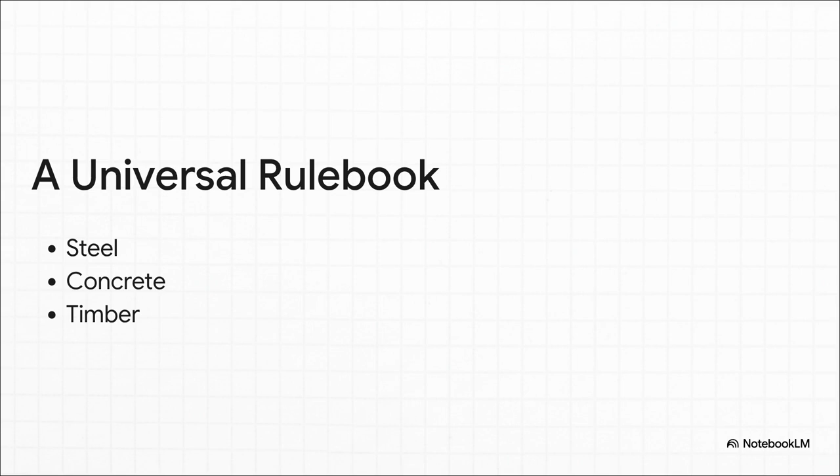You can think of it as the #1 rule for engineers. Its entire job is to make sure a structure is safe and does what it's supposed to do, not just on the day it's built, but for its whole life. And here's the thing, this isn't just for steel. This exact same way of thinking applies whether you're building with concrete or even with timber. It is the universal language of making sure things don't fall down.

So how does this whole philosophy actually work? Well, it all comes down to a really simple and honestly a pretty clever balancing act. I want you to picture a scale. On one side, you have resistance. That's the structure's capacity, how much force it can possibly take. On the other side, you have the load. That's the demand, all the force we're actually putting on it.

Now, to make sure it's always safe, engineers rig the game. They intentionally, on paper, pretend the resistance is lower than it is, and they pretend the load is higher than it's ever going to be. And that is the whole point. That's the entire game right there. The math has to show that the resistance side of that scale always wins, no matter what. It's the one rule that can never, ever be broken.

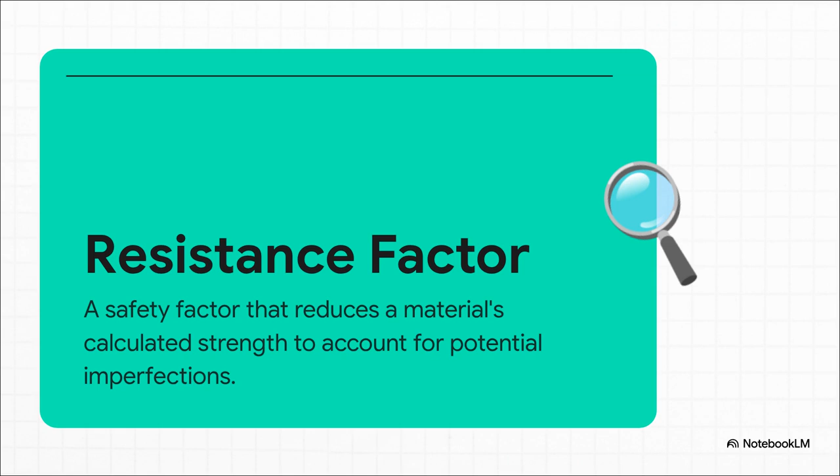So let's look at how they do that. First, engineers apply something called a resistance factor. It's basically a number less than 1 that they multiply the material's strength by. Why? Because they know that in the real world, nothing's perfect. There might be a tiny invisible flaw in the steel, and this factor accounts for that. Okay, so that's one side of the scale tipped.

Then they go and tip the other one. They apply a load factor. They calculate all the forces they expect, from the building's own weight to people to snow, and then they artificially inflate those numbers. This covers all the what ifs. What if there's a record-breaking blizzard or a huge crowd gathers in one spot? They've already planned for it.

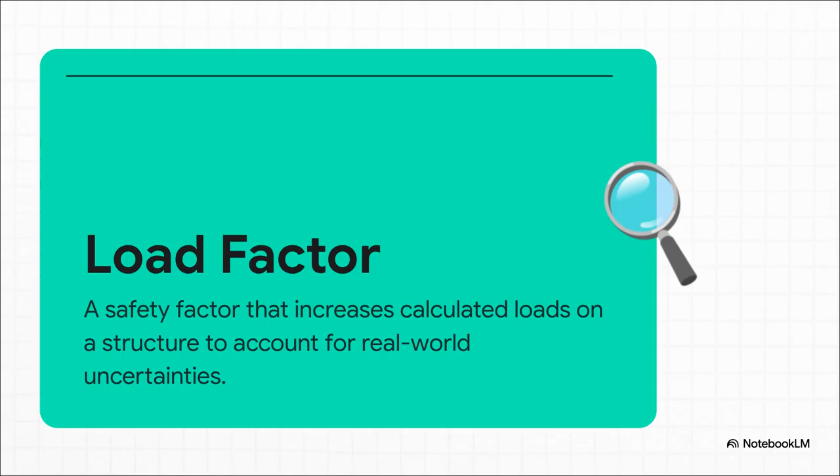Okay, so we know we have to reduce the material's strength on paper, but hang on. How do we even figure out what its true strength is in the first place? Well, the answer is in this incredible diagnostic tool called the stress-strain curve. It's really cool. Engineers take a piece of steel, they stick it in a machine, and they just pull it until it breaks, mapping out exactly how it behaves the whole time.

And that curve, it tells the entire life story of that piece of steel. First, it enters the elastic region, where it stretches like a rubber band and would spring right back if you let go. But if you keep pulling, it hits the yield point. That's the point of no return, where the damage is permanent.

But then, and this is wild, it actually gets stronger for a bit, in a phase called strain hardening. Then it hits its absolute peak, its ultimate strength, before it finally gives up and fractures. Engineers need to know every single one of those points.

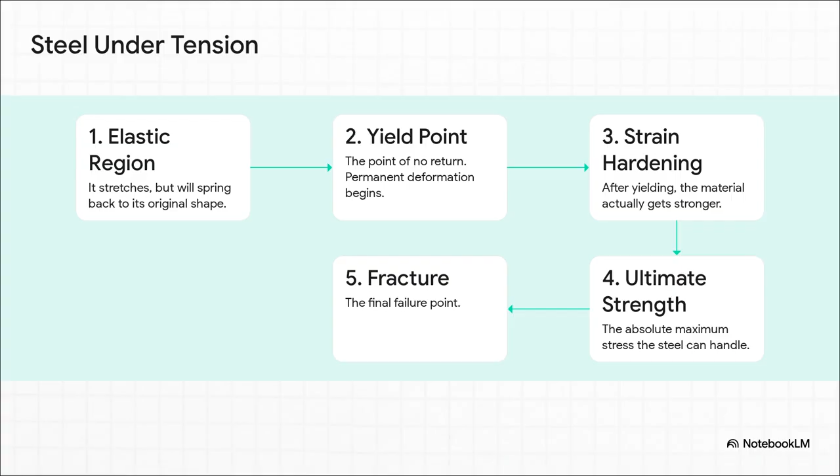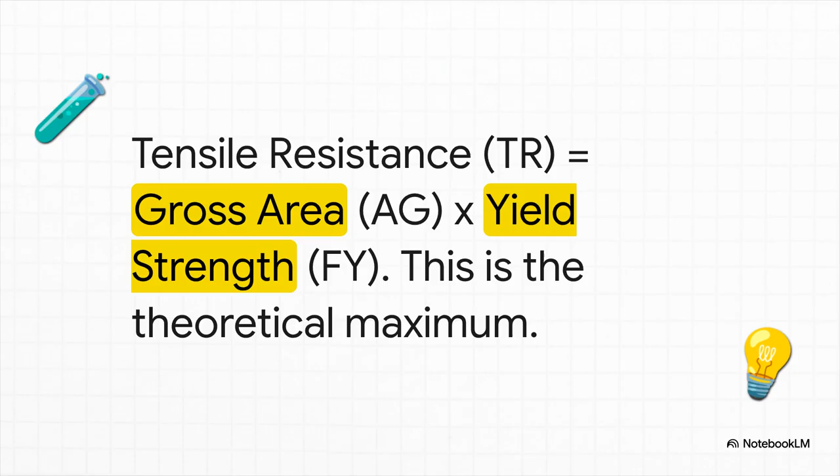So you have all this super detailed knowledge about how steel behaves under pressure. How do you turn that into a practical formula you can actually use for safety? Okay, so at its most basic level, the tensile resistance, or how much you can pull on a steel bar before it yields, is just its cross-sectional area times its yield strength. Seems pretty simple, right? But remember, this is just the theoretical number. We haven't applied our philosophy of safety yet.

So first things first, we apply that resistance factor. For steel, when we're checking for this kind of yielding, the engineering code says we have to use a factor of 0.9. That means engineers are only allowed to trust 90% of the steel's calculated strength. That other 10%, that's our safety cushion.

But the real world is messy. You can't just have perfect, solid bars of steel. You have to connect them somehow, and that usually means drilling holes for bolts. And, well, every single hole you drill creates a potential weak spot. So, to deal with this, engineers calculate something called the net section area. It's exactly what it sounds like. They take the total area and they subtract the area of the holes.

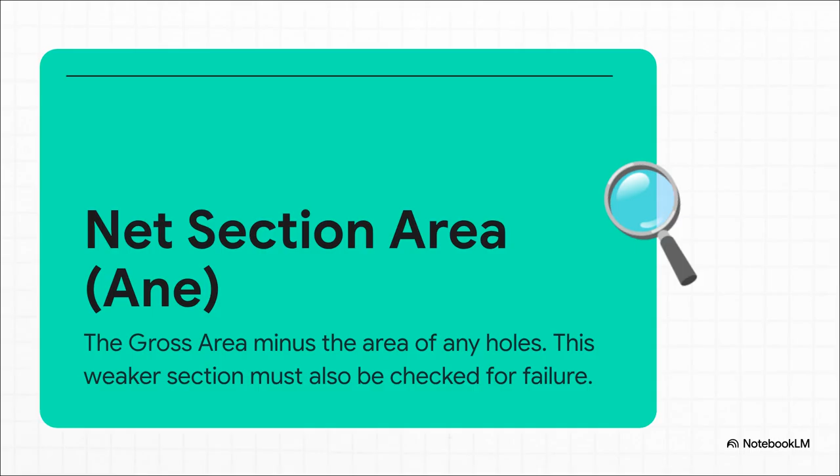They have to do a whole separate check to make sure the steel won't just suddenly snap right at that weaker spot. And because a sudden fracture, a snap, is way, way more dangerous than a slow, gradual yielding, the safety factor is even stricter. For this fracture check, engineers use a resistance factor of 0.75, and they apply it to the steel's ultimate strength, not its yield strength. This builds in an even bigger margin of safety right where it's needed most.

So let's put this all together. What does this whole two-pronged approach, weakening the material and strengthening the loads, actually look like in the end? This right here is the whole philosophy in a nutshell. On one side of the equation, the resistance side, we're deliberately reducing the strength we think we have to cover ourselves against any material flaws or the risk of a sudden fracture. On the other side, the load side, we're amplifying all the forces we expected to face to cover for any uncertainties or overloads the real world might throw at it.

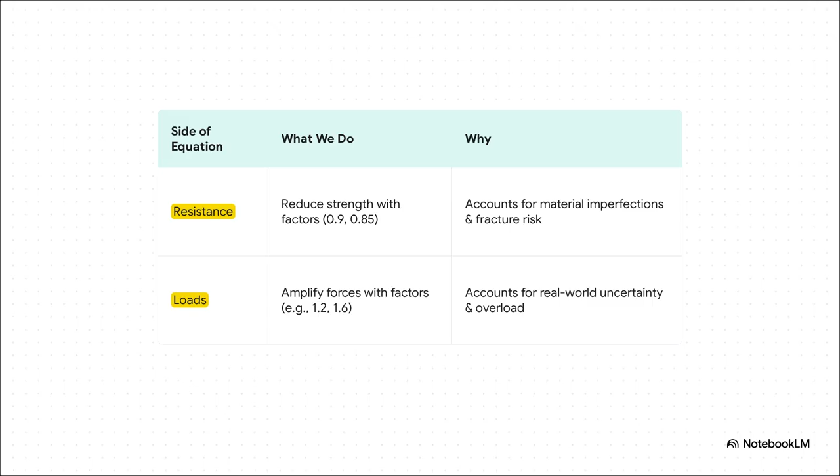You know, when you really boil it down, this entire philosophy is a form of planned pessimism. It's brilliant, right? Engineers start with the assumption that the materials are a little bit weaker than they look, and the forces of nature are a little bit stronger than they seem.

So let's just quickly recap the big ideas. Real structural safety is a guarantee, not a guess. It's a formula, where the nerfed version of a structure's strength is still greater than the buffed-up version of the loads. We figure out a material's true limits with tools like the stress-strain curve, and then we build in these safety factors to protect us from the unknown.

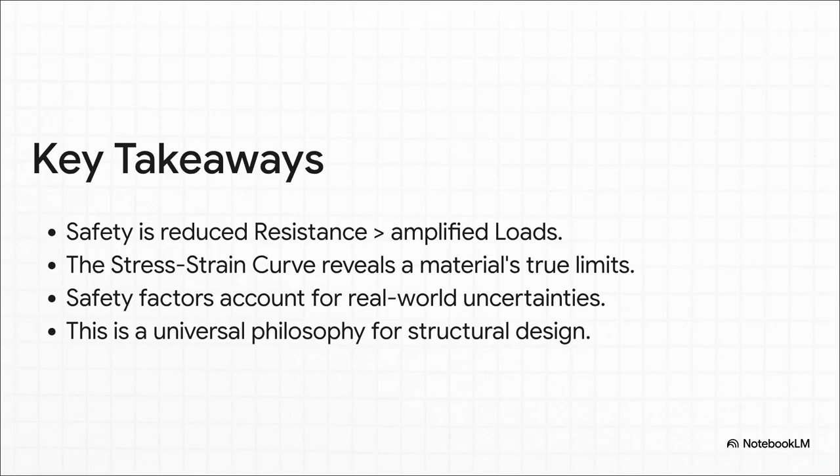And remember, this powerful idea of planned pessimism is the invisible foundation holding up just about every major structure around you. So the next time you walk into a skyscraper or drive across a bridge, just take a second. You're not just standing on steel and concrete, you're standing on a philosophy, a kind of deep, careful pessimism that lets the rest of us live with a whole lot of optimism. Pretty cool, huh?